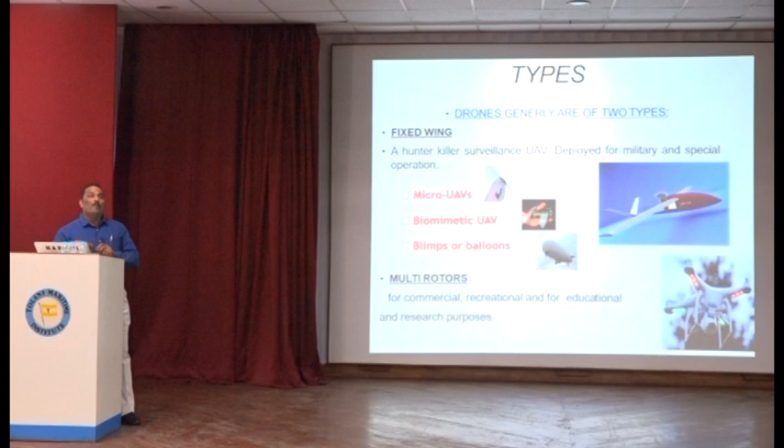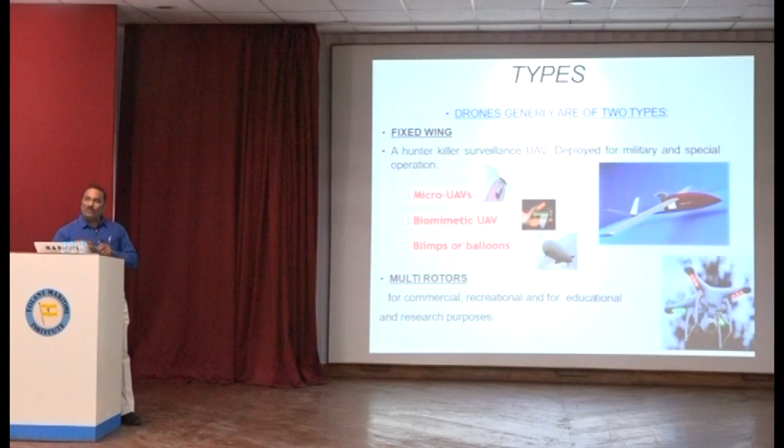And that's the reason some highlights are shown here - micro UAVs, biomimetic UAVs, blimps or balloons and so on. Now, why am I talking about this? Because as a whole, it comprises any UAS systems.

Unmanned aerial system comprises your payload camera, autopilot, ground station, radio controller, RC controller and so on. But interfacing all these things, understanding at what altitude it can fly, and how to balance all these concepts becomes equally tedious.

No, it's not that way. Please understand, when you deal with this kind of concept, you're expected to know about aerodynamics principles, and you're expected to know the structural integrity of that particular system.

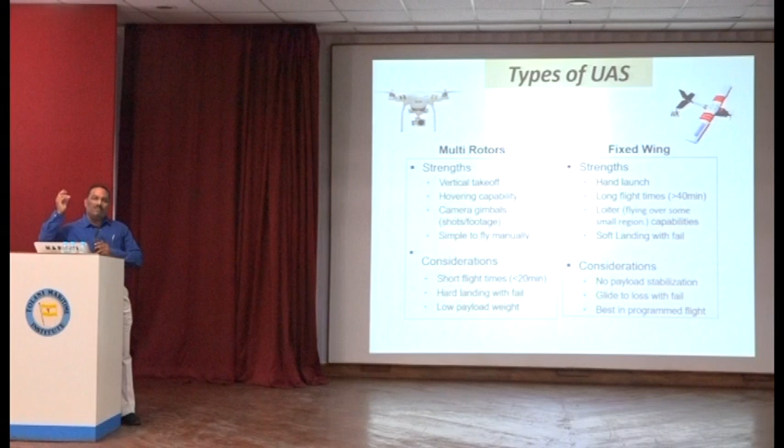Why am I saying this? Take a simple example. When I say hand launch, what I'm trying to say is that the weight of this particular system or drone is expected to be as light as possible, whereas the payload capacity is expected to be very high. What am I trying to address? I'm trying to address strength to weight ratio.

When I say the strength to weight ratio, please understand, the AI person here will appreciate this. Whenever we design a structural system, we bring in all our design concepts, two important ones: specific strength and specific stiffness. Let's understand - am I talking with respect to specific strength, or am I talking about specific stiffness? This is how all the aircraft industries design structural components. All the automotive sectors design using the same principles we're expected to incorporate when designing drones.

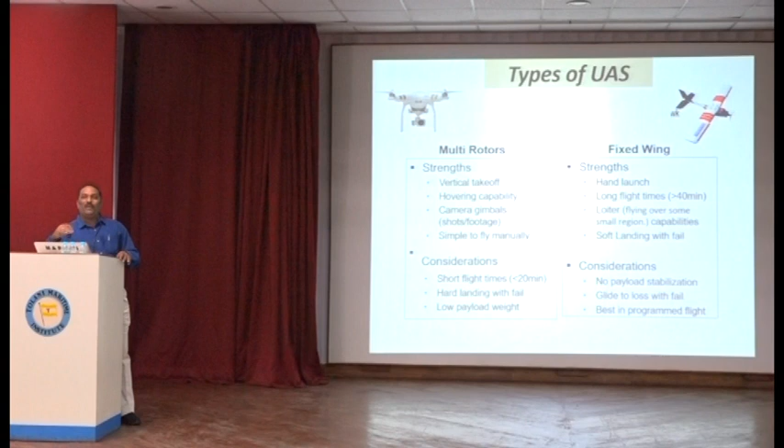When I say specific strength, that's sigma by rho. When I talk about specific stiffness, that's E by rho - then I need to know the E of that particular material, and the rho of that particular material. That's the reason I told you the weight of the system is expected to be reduced, and the payload capacities are expected to be enhanced.

Unfortunately, the moment we think of developing certain things, we don't get into the technical details of those things. Whatever is available on the internet, we make use of it and try to fly. Please don't do that, because you are investing money.

I'm a teacher, I'm a poor person - even 100 rupees is a big amount for me. Whatever, that's what I said. From the industry point of view, good number of industry people are here. The moment you get into the industry, they talk about waste minimization, cost cutting, and those kinds of management principles you need to incorporate when you develop these systems.

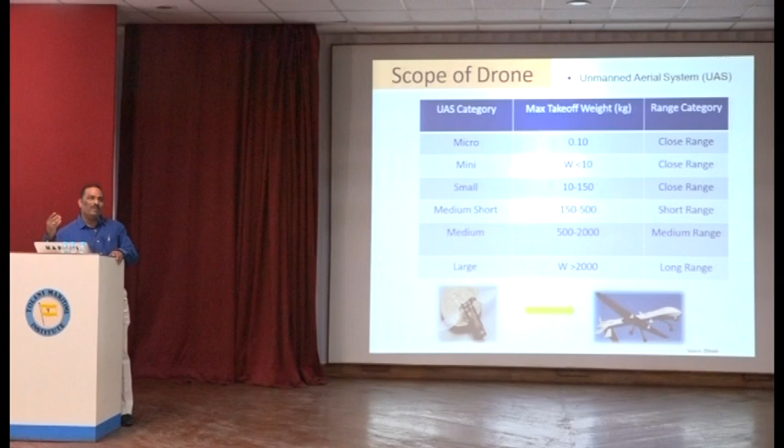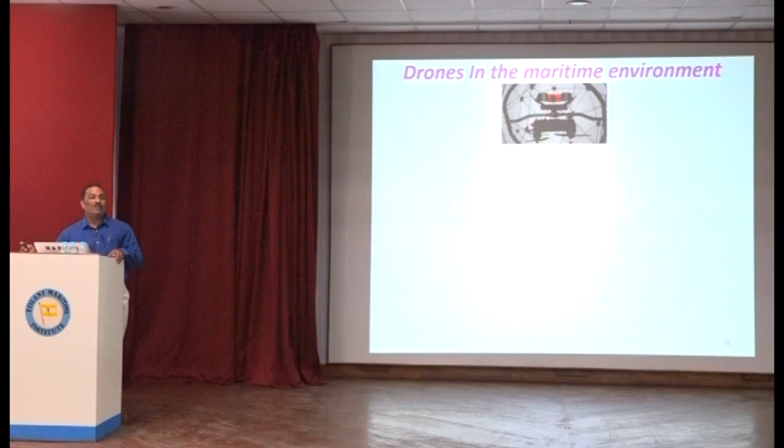We are expected to look into drones in the maritime environment. As a teacher, as a researcher, as a student, you are expected to read a lot and see what exactly is happening. We cannot indigenously develop everything, but we can mimic. In engineering we follow a concept called reverse engineering, which in Indian terms is called Jugaad. We study certain systems because there is no point in reinventing the wheel since we don't have that much time, but we can build value addition to existing systems, and that is what we are expected to do.

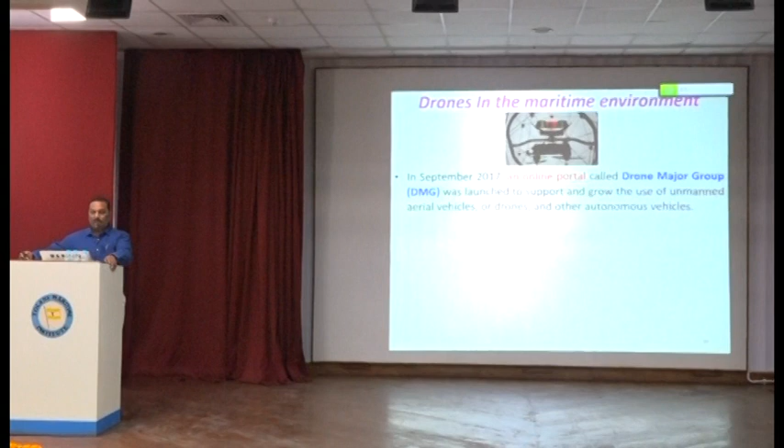If you look into this particular online portal advocating for the maritime industry, it's called the Drone Major Group. DMG was launched to support and grow the use of unmanned aerial vehicles or drones and other autonomous vehicles, focused on underwater, air, surface, and space drones. The online marketplace demonstrates growing capabilities in the maritime environment. Look at how people are trying to have their own portal and support the maritime industry.

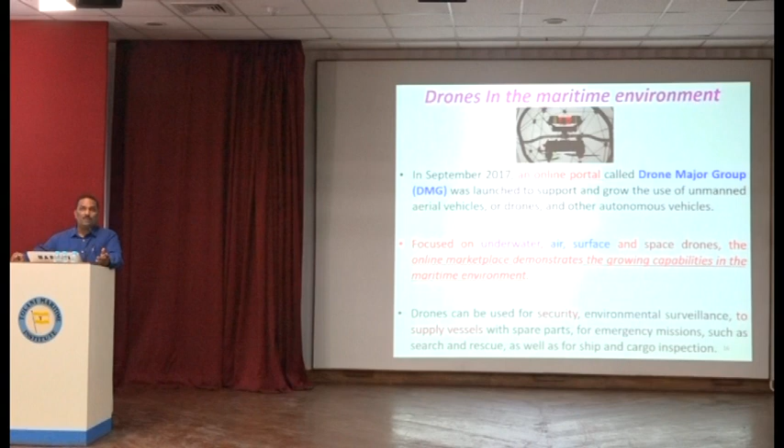Drones can be used for security, environmental surveillance, to supply vessels with spare parts, for emergency missions such as search and rescue, as well as for ship and cargo inspections. Inspection is a very difficult task, especially when you are in the sea, which can be taken care of by these robots, by these drones or UAVs. Look how nicely this improves ship safety and speeds up maintenance and repairs.

I'm closely associated with the Indian Navy, specifically in Visakhapatnam, because I'm developing components for their warships, basically the fuel pump. Most captains deal with these fuel pumps which are very difficult. Why am I quoting this? They face a major problem with this particular pump, which is very handy - you can literally hold it in your hand. Sometimes when they are out at sea and something doesn't work, they immediately ask for this part, but transporting it through the sea takes a lot of time. If I could deploy it using a drone, it doesn't weigh much. Also, those ships are supplied from Russia, and they're not providing this kind of service to India because, after all, they've set up their business to earn money - they're not there to do charity. So indigenously, we are trying to develop those kinds of fuel pumps.

I'm working closely with Wipro's 3D printing to develop those pumps. The reason is that they're asking us to develop it as light as possible so that they can transport it onto those vessels, onto those ships, comfortably.

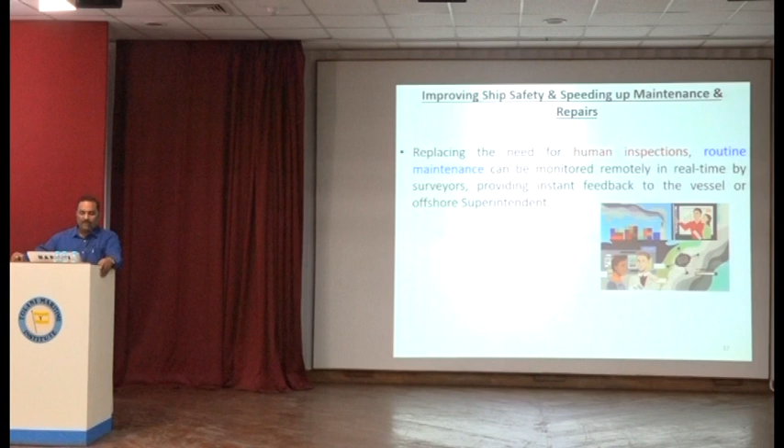How to do that? Replacing the need for human inspection, routine maintenance can be monitored remotely in real time, with surveyors providing instant feedback to the vessel or offshore superintendent. This in turn reduces the cost. That's what I told you - the management principle you are expected to bring in, because today people are working a lot on cost cutting. This increases efficiency and significantly reduces the risk to human life during essential maintenance.

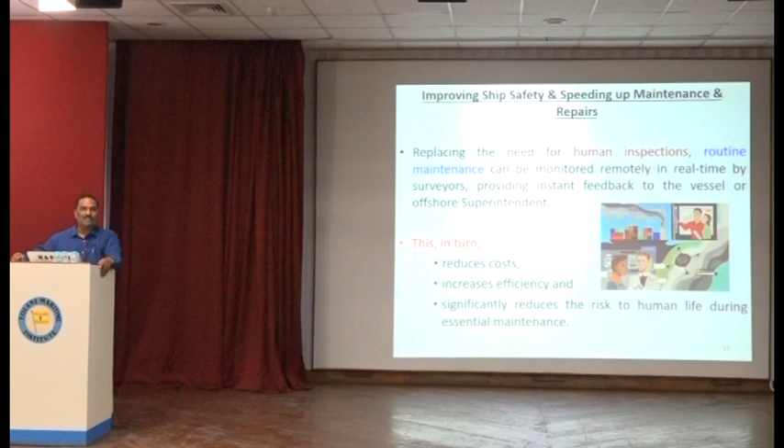Similarly, drones make access to challenging areas a breeze. They can be flown into high up or hazardous areas to check the structural integrity of vessels or loaded cargoes. Structural integrity is becoming a major issue. Why am I talking about structural integrity? Most of the time you will find that crack propagation starts from the surfaces itself. You are expected to look at those cracks which get initiated on the surface, and that is the reason the surface engineering branch is becoming very popular in the aerospace industry and the marine industry.

Even during winter season, we take care of surfaces, and that is the reason cosmetic industries are making a lot of money. Earlier, they used to make cosmetic products for taking care of women only, as Women's Day is coming. But today they know a lot of potential is there with men also. That is because surfaces, equally in engineering, play a very important role.

For such kind of big vessels, ships and so on, most of the failures occur because of structural damages. The best examples are the Liberty ship, which because of structural integrity issues collapsed into two parts, and our very own Titanic, which failed due to material science issues including crack propagation — once initiated, you need to arrest it.

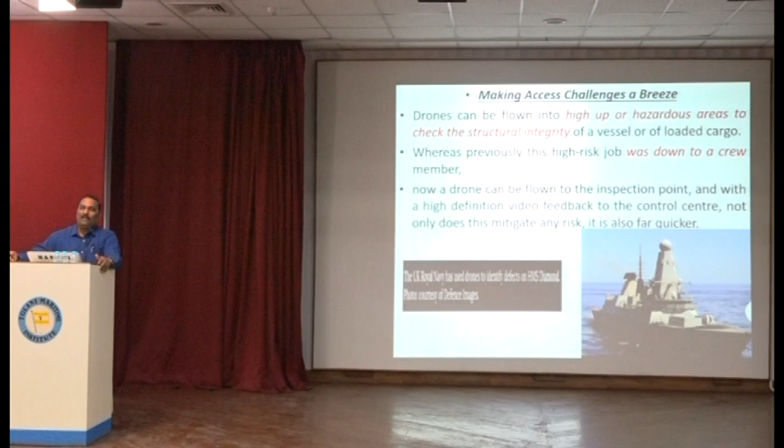Such corrective measures are why, in the drone industry, people are trying to incorporate self-healing structures. Self-healing structures or special paints are getting deployed to correct structural cracks. That's why people are working a lot on this in the US, because they have an agency called DARPA which pumps a lot of money into defense research. Similarly, in India, people are working to develop drones to correct structural damages.

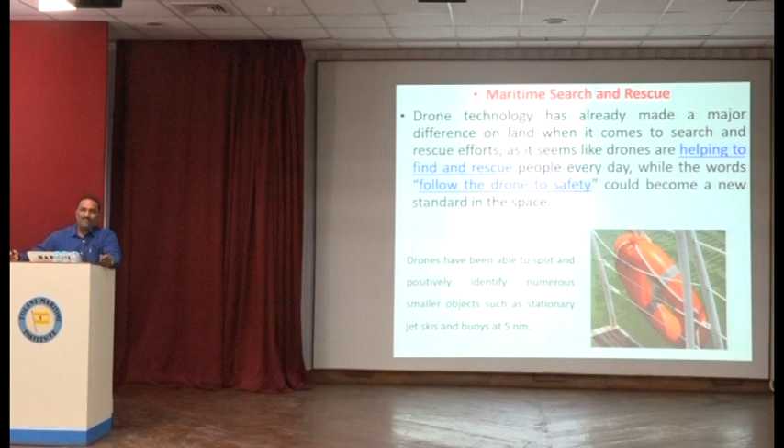Drones have been able to spot and positively identify numerous small objects such as stationary jet skis and buoys at a distance. Just imagine — microtechnology and nanotechnology are becoming part and parcel of maritime drones. These are some of the highlights I'd like to present to you.

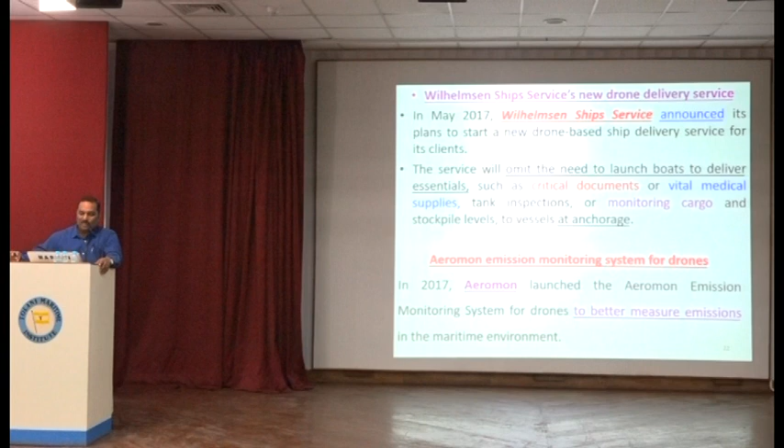Wilhelmsen Ships Service announced its plans to start a new drone-based ship delivery service for its clients. The service will remove the need to launch boats to deliver essentials such as critical documents or vital medical supplies, tank inspection, monitoring cargo, and stockpile levels to vessels at anchorage. There's also an emission monitoring system for drones to better measure emissions in maritime environments. We could go on talking about applications like this.

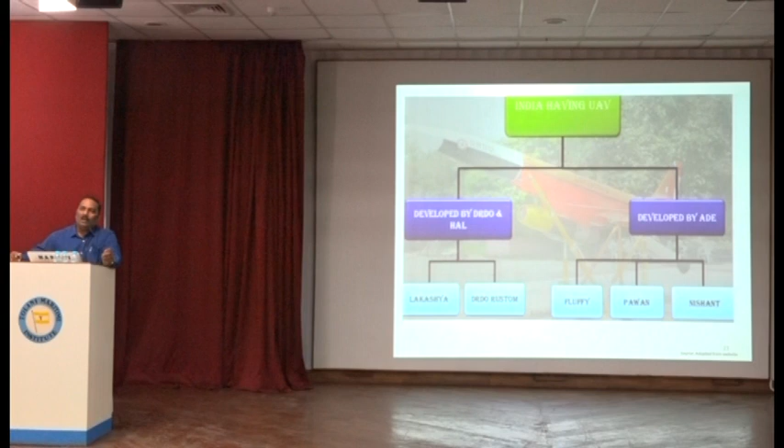Where are we? As DRDO, we are also part of this kind of UAV development. These are some UAVs developed by DRDO labs which I'll show you: Lakshya, DRDO Rustom, Pawan, Nishant. Similarly, at mine detection levels too, people are working a lot on developing these kinds of drones.

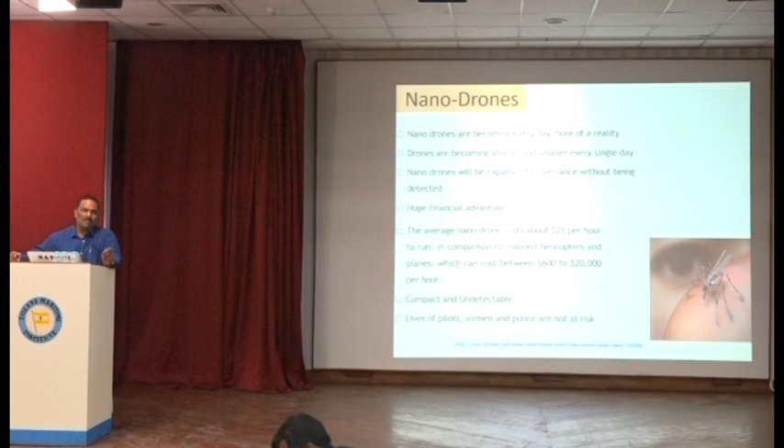What is going to be the future? As I told you, gone are the days we talked only about macro-level drone development. People are now working on nano-level drones. That is why I call these nature-inspired designs — people are trying to mimic mosquitoes, trying to mimic flies. That's why they constantly observe these creatures available in nature and try to mimic them.

In concluding remarks, unmanned aerial vehicles are an exciting field in the world of aviation with new discoveries. Over the next 16 years, UAVs will become a significant component of military, civil, and perhaps even commercial aviation. The Federal Aviation Administration believes there will be around 30,000 drones in the sky by 2020, although some say that figure will be much more.